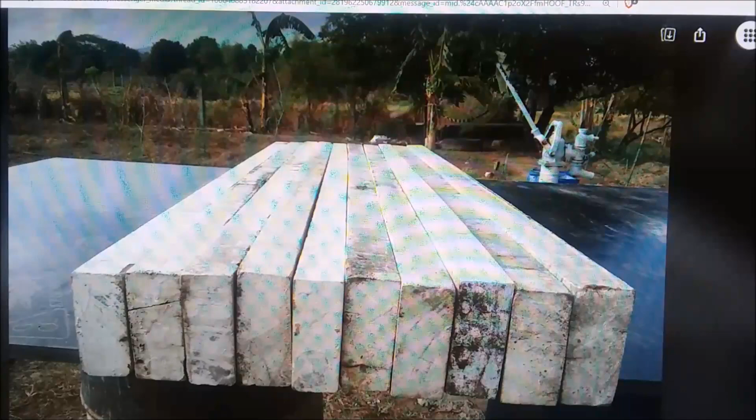They keep moving around the property with them. I don't know what that's all about.

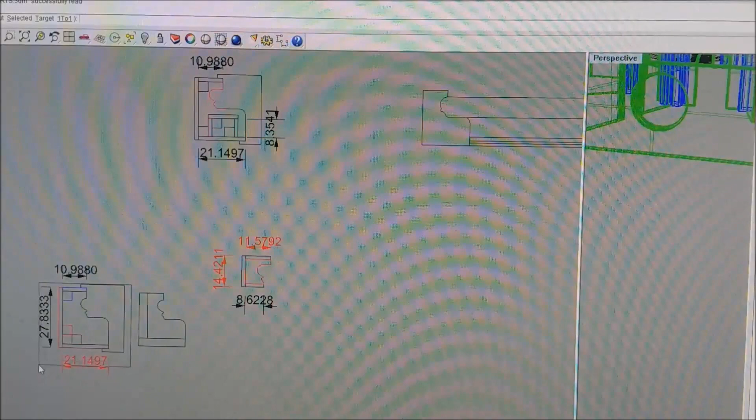Let's show you what we're going to do with these things. Here's a drawing. Okay, let's just zoom in here. Man, I hope you can see this. It's not real distinct on the camera. I don't know if it's this or not. I don't think it made much difference.

This rectangular shape out here, that's a piece we're going to cut out of stainless, and it'll have this shape in here. And this is the reverse image of what we're going to use for molding on all of our countertops all through the project. That's in the bedroom counters, the bathroom vanities, dirty kitchen. We have two more of those kitchen counters like the one we just looked at. They'll be in the dirty kitchen.

This over here, this is an end plate. It's made out of phenolic board, and it's got some 2x2 pieces that basically take up space. When we get the size of the concrete, I'm going to put a 2x4 here and one up here, and these all bolt together so that you can lift off the individual pieces and end up with this cast concrete piece. And then we'll take some blocks where this board here was. We'll put some blocks on the floor and set this pattern down.

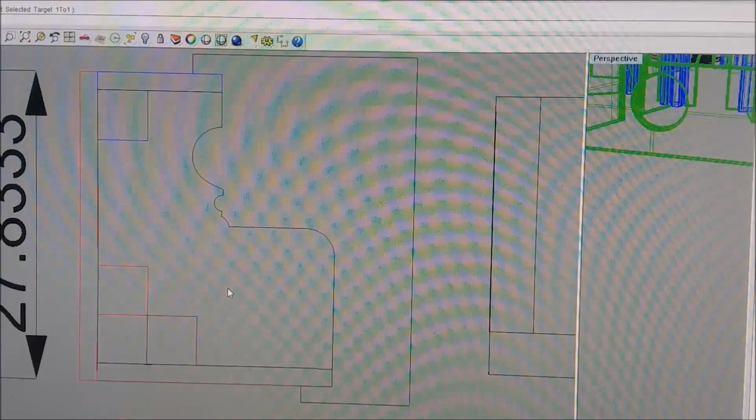And also, if you have to cut mitered ends on this to make corners and stuff, you have to cut through this. So we don't want more than half a blade thickness on either side to cut through. We can cut from both sides and then smack it with a hammer on the waste side and pop it off. And then you have to get the diamond dry tile blade and trim it some.

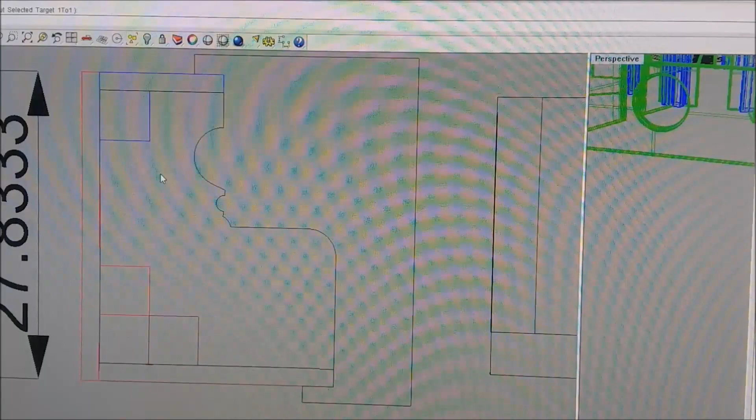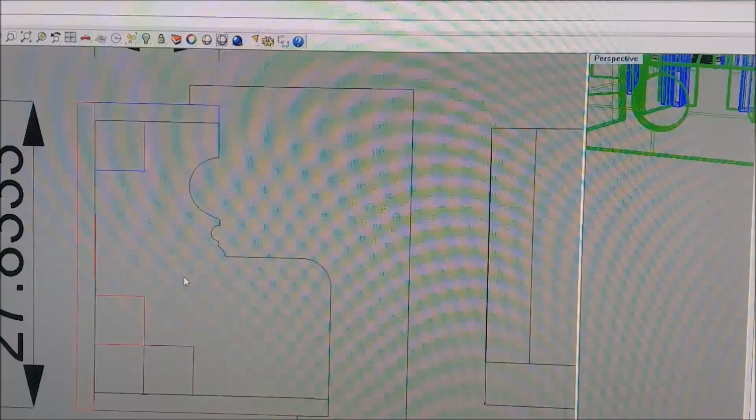This stainless piece here, this whole works is to be laying on this back side over here on the left, and you dump your cement and sand mixture, like mortar mix, except we use a little bit extra cement compared to mortar. Mortar's 4-to-1. We mix this 3.5-ish to 1. You drag this thing down and shove it along, leaving this shape.

And you can't do it in one pass, obviously, but you're going to throw a bunch in the bottom, and then you're going to throw another layer on top. About the third layer you throw in there, it's starting to look like the thing a little bit. Well, like it melted, I don't know. Anyway, when you come down after that and you actually start touching the material and dragging it to that profile, your next pass, you're going to sprinkle it with water, like a 2-liter Coca-Cola bottle with a hole in the cap, knocked in with a nail, not drilled.

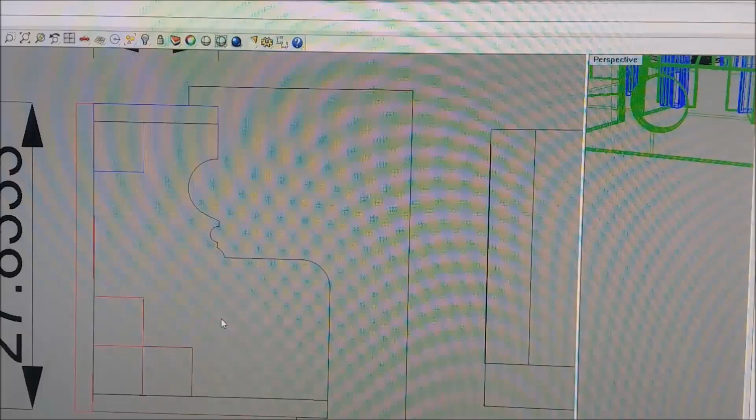And you sprinkle it with water, and then you come by with a bucket of dry cement and just a handful of it, and just trickle it all over that, make the surface white. And that way when you put the next layer of this mortar mix on there, it sticks, it bonds. And you're going to make about 5 passes that way over the whole 8 foot. And this end plate is the same shape as what we're doing. So when you get to the end, any excess just gets pushed off the end of the form. And anyway, you get this piece.

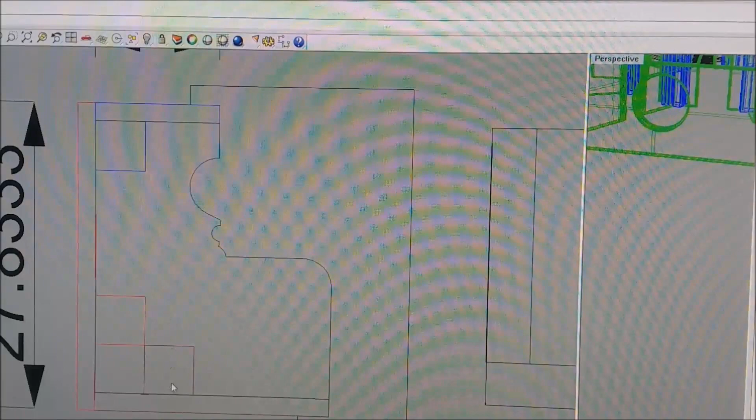When you're making these things, this stainless plate has got a couple tabs that run down on the top phenolic board and under the bottom. That locates it up and down, and this face here in and out, so that it tracks. It's like being on rails. The kitchen countertop or bathroom vanity top has exactly the same shape, just for uniformity in the house.

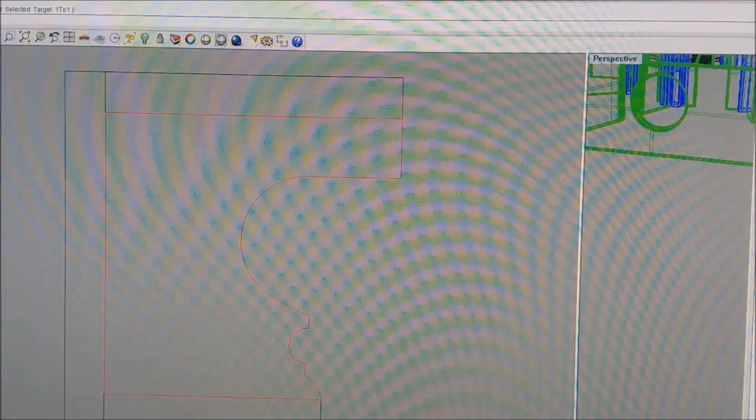Yeah, I wish that showed up better. Edit. Layers. That shows up better. That's black.

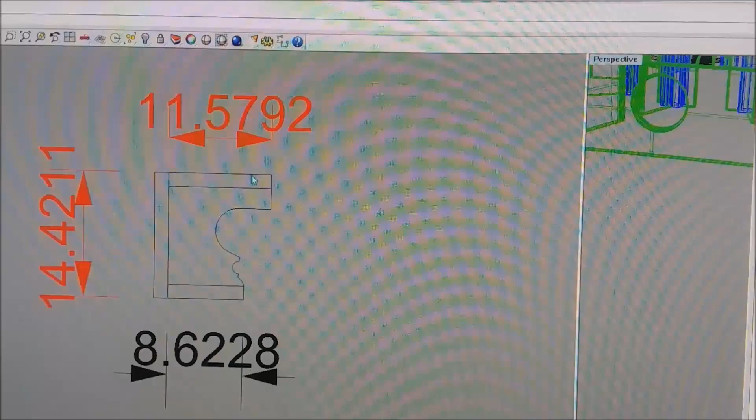Well, the other one was black too, but it didn't show up. And there'll be another stainless drag that makes this shape. Okay.

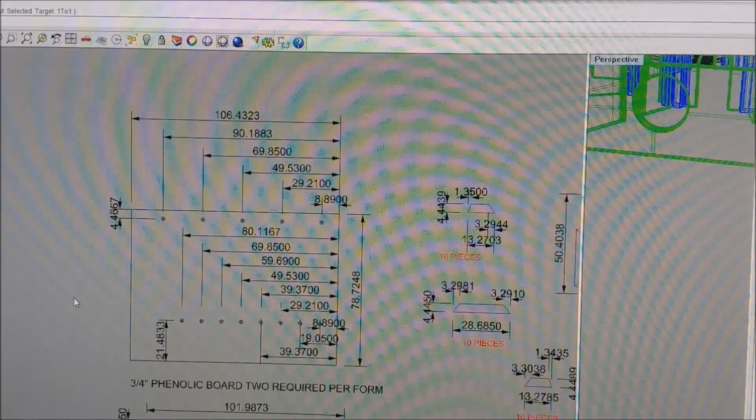Next thing, what we're doing here is we're making the supports that go under the countertop between the floor and the bottom of the counter. You have these uprights generally made out of 4-inch hollow blocks, slathered in render, and then skim coated, and all the stuff you do when you're working with hollow blocks. And then you pour a 3-inch slab of concrete on top of that, and that'll have some rebar in it, fit around the sinkhole, and just generally in the top, maybe 7 or 8 inches apart both directions.

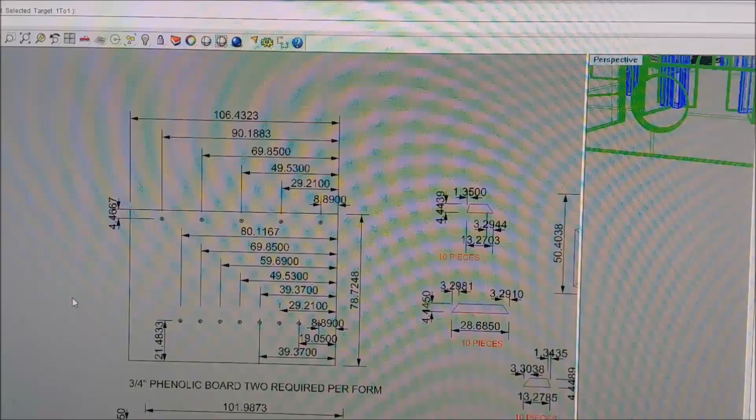And on top of that, you're going to put a piece of granite. Or you can take... Richard Armstrong is building a house up there in northern Luzon. And that's the island that Manila's on. And he's doing all polished concrete. And his stuff looks so good. We're initially going to go with polished concrete. We're going to copy him. We copy a lot of people.

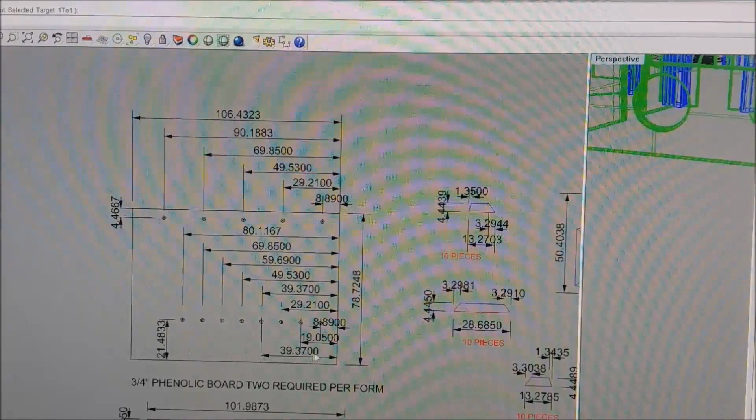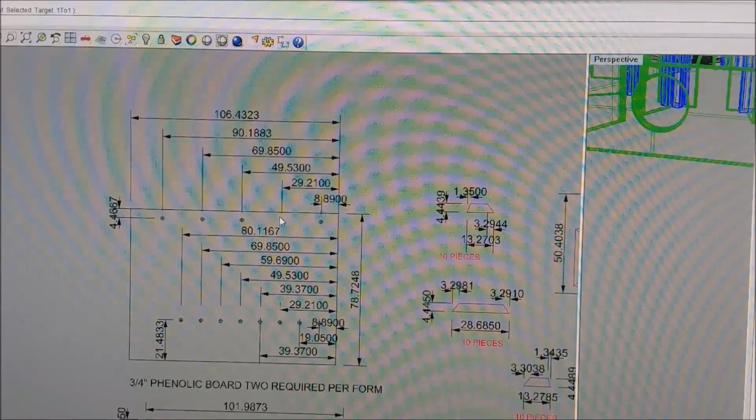The top ones, these are just holes that after we cast it, we're going to just put short pieces of rebar in, and then we can set phenolic board from one upright to the next, which will be what holds the concrete till it cures. Then you tap out these pins, and the phenolic board, you hold on one edge and knock on it, it'll come down. Plus, it'll have this sitting out here, the concrete molding edge, that just comes right off, and that gives you a big wide shelf to smack with a block of wood and a hammer.

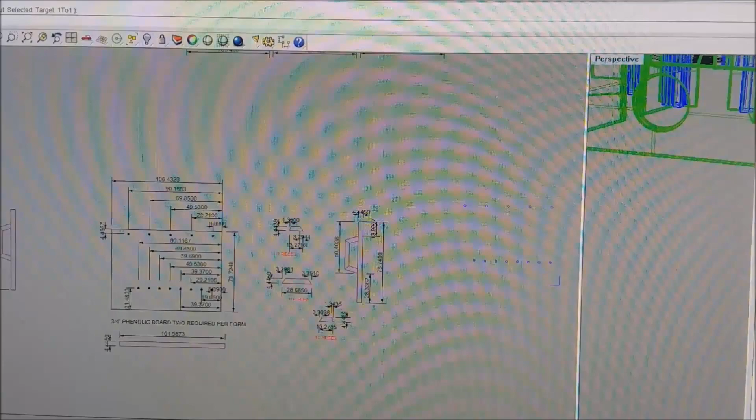There's an end piece that's going to fit in the back, and a bottom piece that's going to fit on the bottom, and a divider piece. We've got the drawings done for pretty much all this. This is all the little bits that go into one mold. We're making 9 molds. We're going to use each of them at least 9 times. Probably 14 or 15 times when all is said and done.

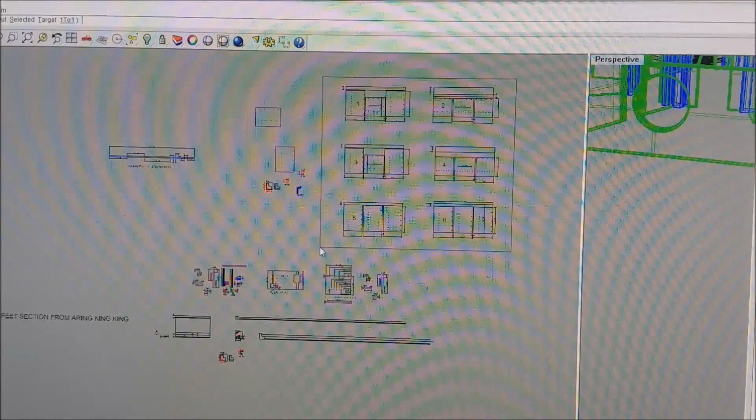Oh, you didn't want to do that?

Let's try again. Yeah. Okay, this is 6 sheets of plywood. Phenolic board. I like phenolic board because you just dust it with WD-40 and wipe around with a paper towel, and nothing sticks to it. And as long as you keep doing that, you can use it there forever.

So we have this longish one that covers the widest countertop piece we made. And then we have some that aren't as long. This is from the wall out to the middle of the room, that direction. And then we have some that look like this first one, but these are actually taller. And the pieces on the edge up here, those are part of the tracks for making the moldings that give us the edges.

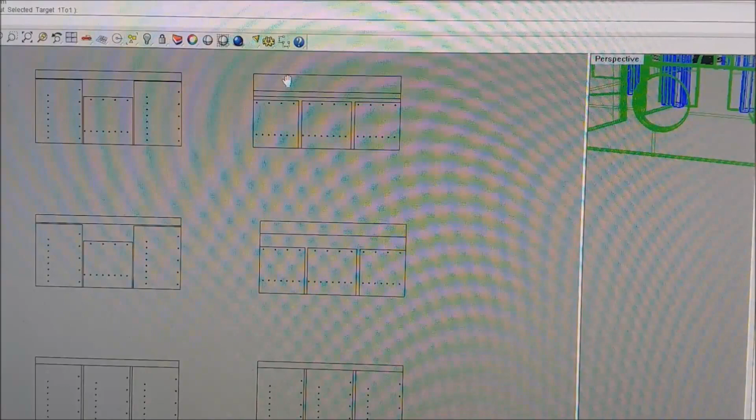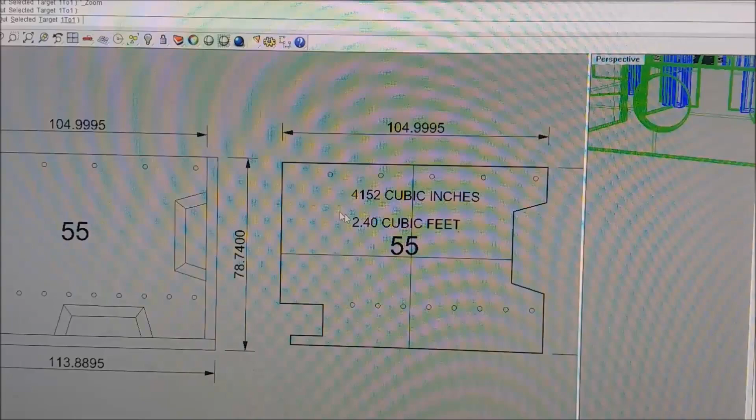Nope. Let's just take an example here and look at one of them. These go under the dirty kitchen counter. I know that because the part numbers are from 50 to 58, and this is 55. So this is about the widest piece.

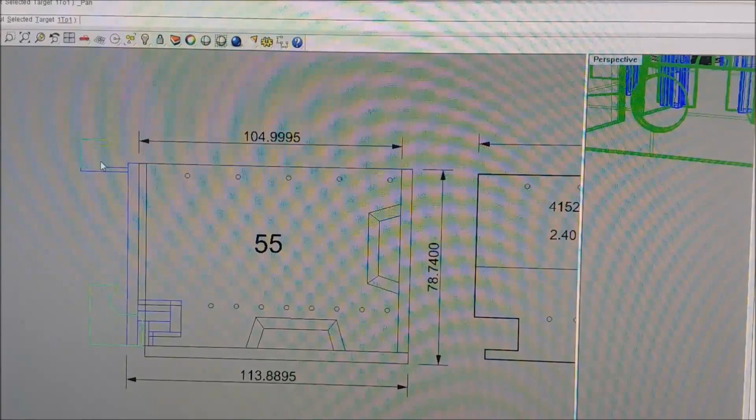When we go to use this, here's your bottom piece of concrete that's going to sit on the floor. Here's the top one that sits on the phenolic board, and the counter will come out to there. And then all your cabinet doors and hardware bolt to the front of these things. So this is not really 3.5 inches of under space clearance.

And of course, you look at the mirror image. The actual countertop ends at this little horizontal line up here. The little straight up line, that's your depth gauge for how deep to pour the concrete. There's a piece of wood with that cut on it. You just drag it down along the top of this, and that levels that edge. And then you have fishing line to determine the rest of the things.

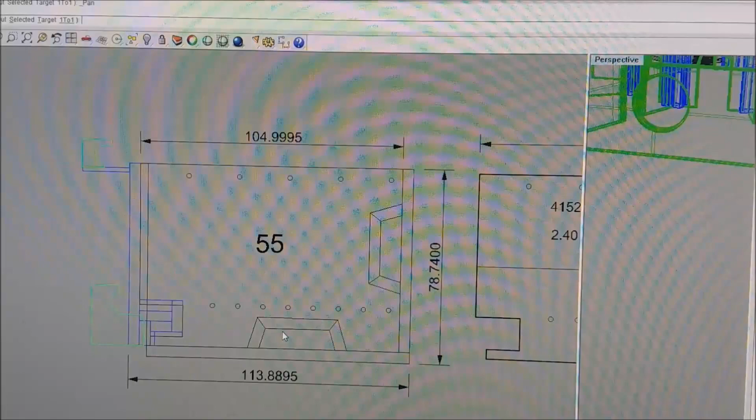This thing down the side here, it comes down and makes this toe kick shape. And there's a gap between these, so we can run a couple rebars clear out to this edge for support. In the bottom, this bottom piece has got a trapezoidal chunk on it, and that gives us the place to run big pipes from one side of the place to the other. But that'll be inside of the cabinet base concrete, so this will disappear once you pour the base.

In the back, you have that same trapezoidal piece, and this is where you run all the plumbing pipes and stuff, like for the kitchen and the gas lines and all that other stuff. It'll be retained to the back.

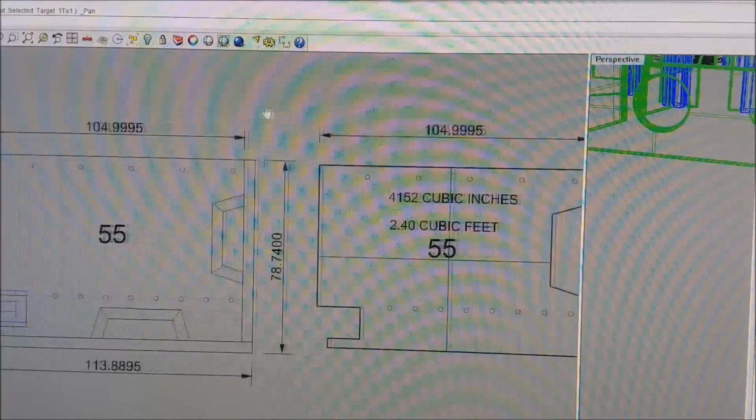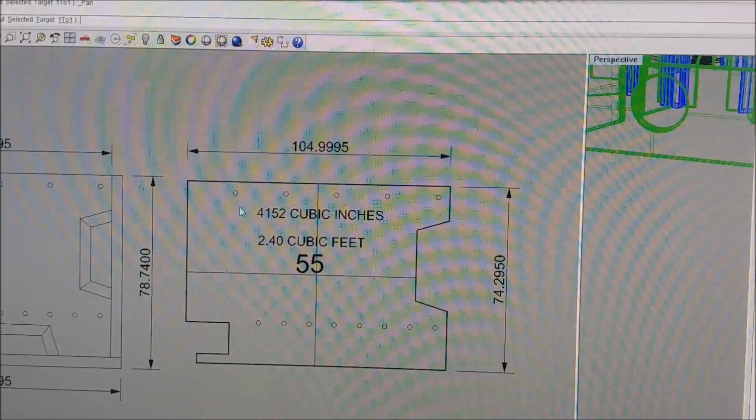This is the actual piece we're making. Part number 55. That's round about the middle of that kitchen counter. Now these holes here, there's two of these plates, one on either side of the upright that we're casting, and you'll put a piece of 1/2 inch blue plastic pipe, because the blue's cheaper than the orange by about 35%

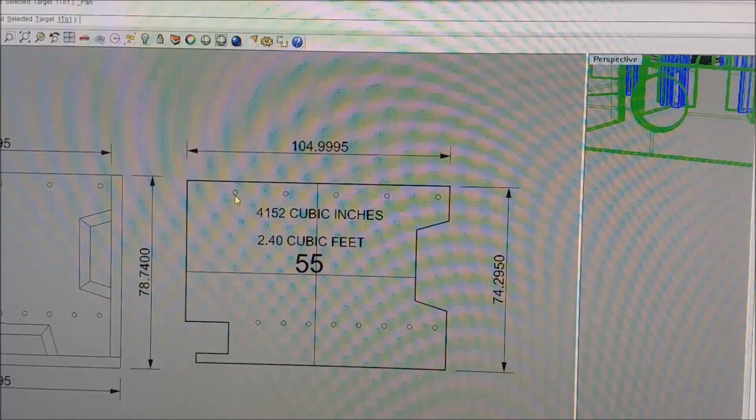for some reason. Anyway, that's the same as when we pour concrete walls with slip forms, and Texas Filipino builds with concrete. We put these blue, he uses any color he can get. I use blue now. I used to use orange till I found out they were more expensive.

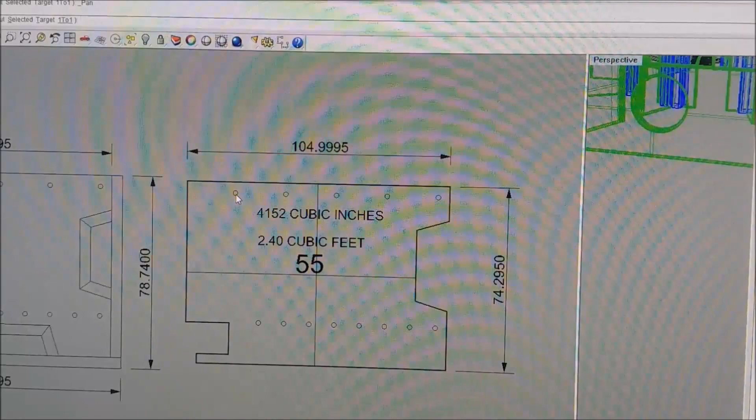But the pipes are in the concrete when you peel the sides off. Then you can knock them out or not, and that'll give you a place to run rebars through or set something on. But you have to put the pipes in there for the spacers. You clamp these plates together with these, all of them. The bottom piece, if it had this trapezoidal piece, they would all look just like this.

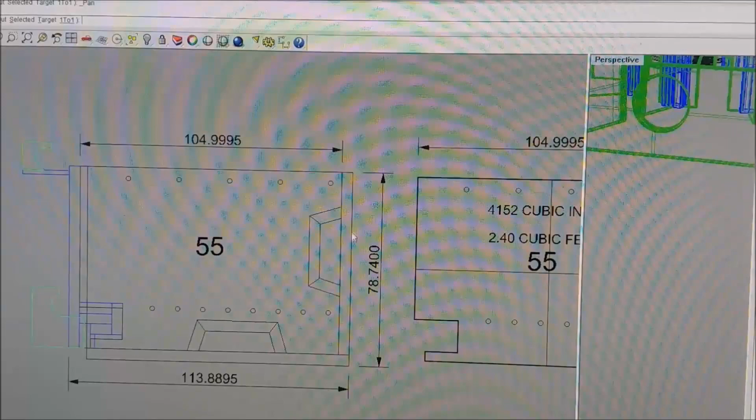And if not, we only use this on a couple. So basically you have a bottom board stuck to your side plate, and this back piece. If you don't need to cut out in the back, you flip this over and the trapezoid is on the outside. I don't know if we have an example of that real quick.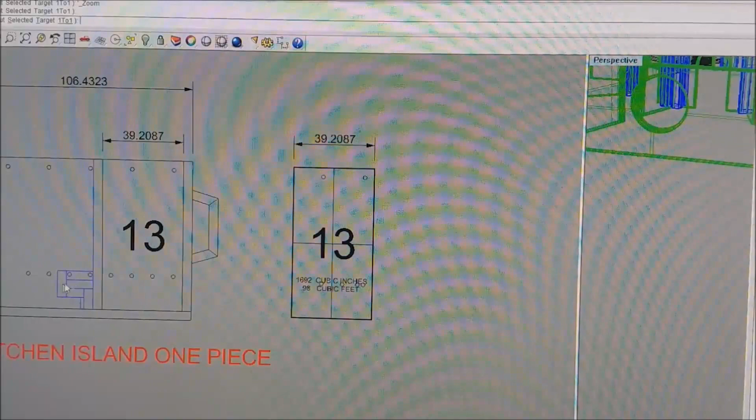Well, that's this one. Here's one where we have none on the bottom. We have got none on the toe kick side, so this one's flipped over also. So you're casting just a rectangular piece on that one. You'll notice that on these, part number 13, lucky 13.

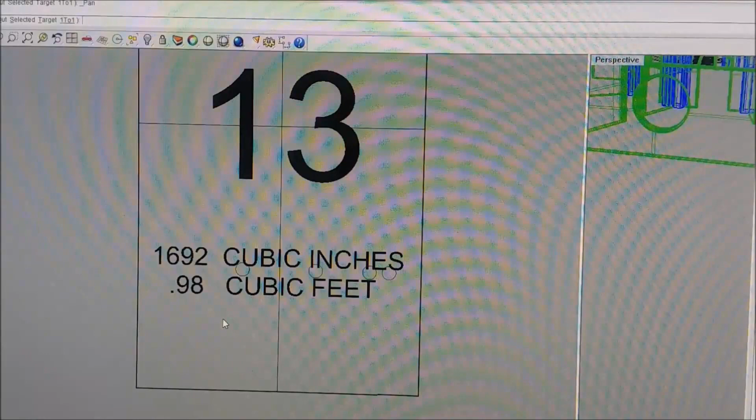1,692 cubic inches of concrete, that's 0.98 cubic feet. Okay, one bag of Portland cement and the rock and the sand makes 5 cubic feet of concrete. So what they're going to do is select which part numbers they want to pour, so that they come out to like 4.9 cubic feet, or 9.9, or 14.9. You know, 1 bag, 2 bags, 3 bags.

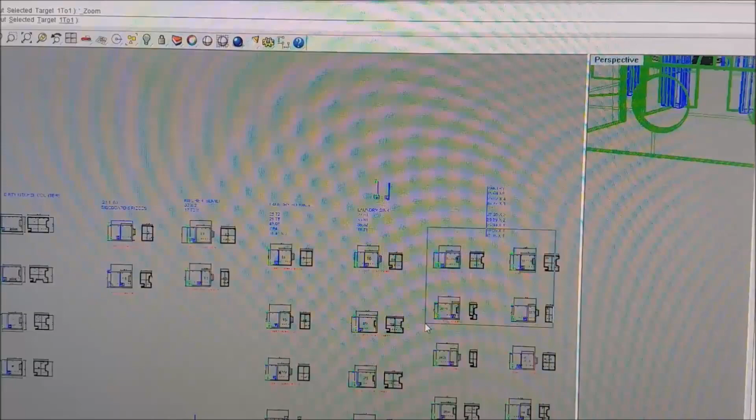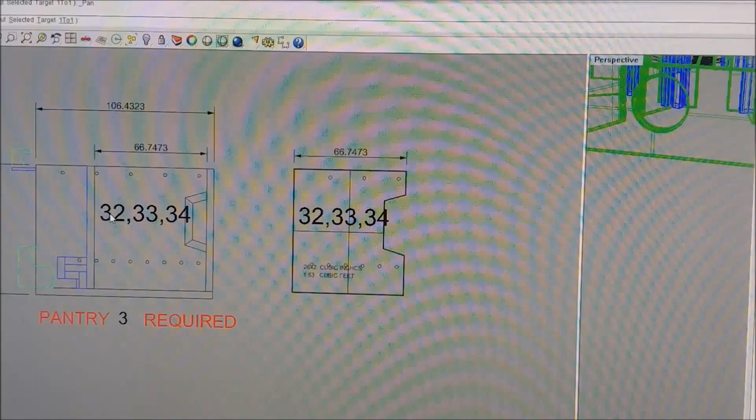All these. An example. Okay. This goes in the pantry, in some kind of a shelf and storage cabinet in the pantry. It says down here, 3 are required. The numbers on the drawing, which we're not going to get into today, but there's drawings for all these cabinets assembled and the room they go in, and locator numbers on them.

So this particular pantry shelf uses 32, 33, and 34 of this size. And there'll be end pieces that haven't got the back cut out because you don't want an end showing on your cabinet that the dog could climb into. There's 35, 36, and 37, 38, and 39 farther down.

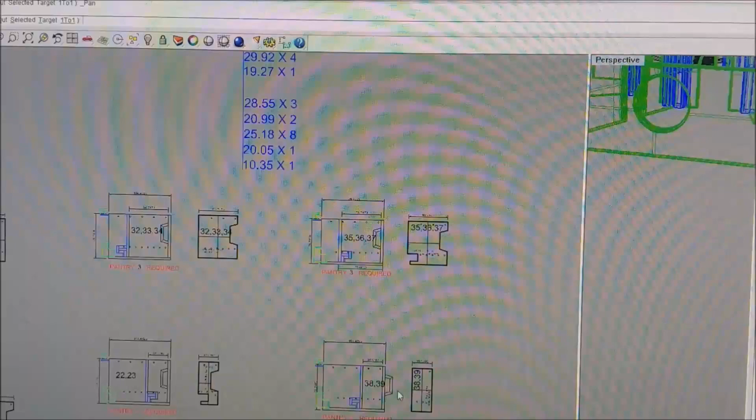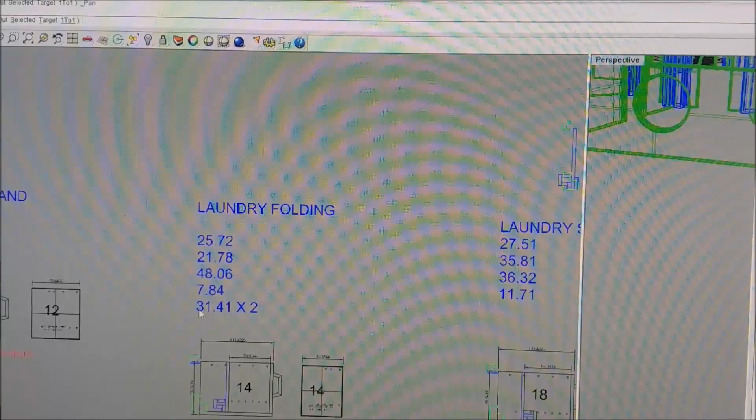For instance, this is for the laundry sink. And we have 4 different widths. If there was more than one piece, it would be in the call out. See, the width on this one is 31.41 inches times 2 pieces.

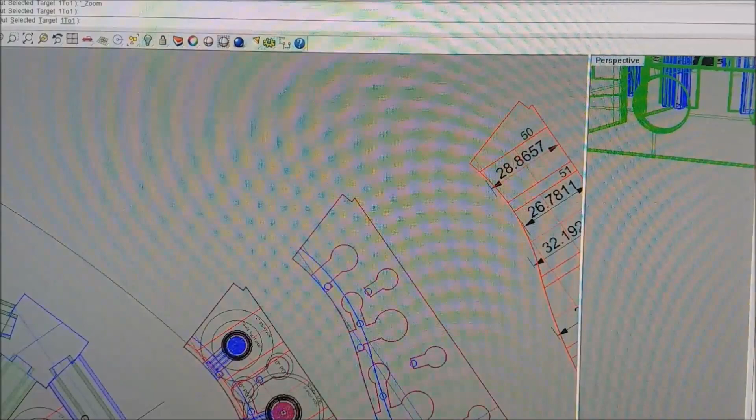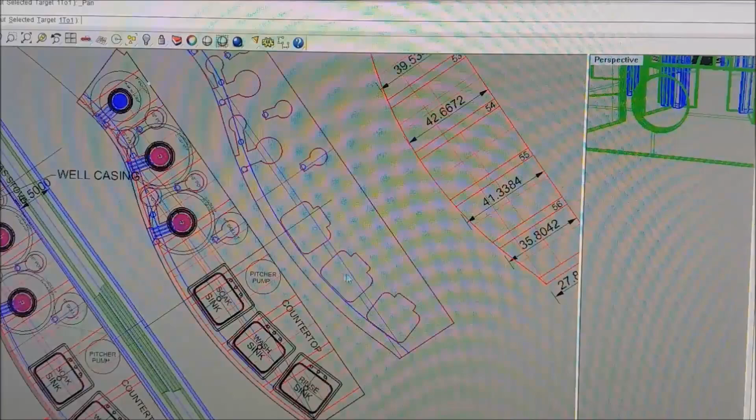Oh, this is what our kitchen counter looks like. It's got a soak sink, a wash sink, and a rinse sink. And the dishwasher would be on the right. The next picture up here is the cutouts that are in that countertop.

And the reason they're long like this is because we're using those gas burners like the street vendors have, cast iron burners. And we've set stainless steel pots down in the concrete to make this opening. And you have 3 gas valves. So in actuality, what we did was we put 2 pots.

This is an early drawing. See, it still got the Franke sinks in it. We went with the round sinks since this drawing was done. But your gas valves are here. The blue hole is the air intake, goes down into the cabinets underneath. And since this is now a smaller round pot, you have a lid that covers up the valves and keeps the trash out of there.

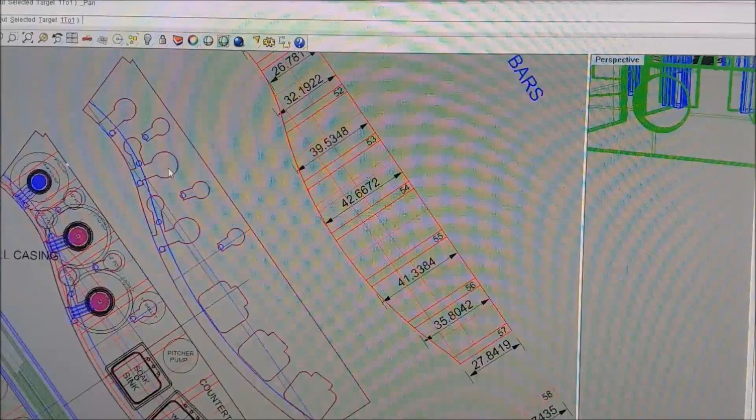And the burner sits down in this well inside of what was actually a stainless pot. We bought some without a lid for this. And we got a fire brick that sits in the bottom down there, and it sits on top of it. Fire brick just to raise it up to the right height and give us air circulation. Oh, while we're on this drawing.

Okay, this is going to be for this chunk over here. It's 28.8657 centimeters. Now, nobody can measure to 4 decimal places with a measuring tape. But if you design in inches and you have a 4 decimal number here, there's very few people that know their 16ths or 32nds in decimal. And definitely none of our people. None of the people that work in the Philippines work with

decimals, fractional decimals. So what we have here is we have 28 full centimeters, and the next graduation mark on a centimeter tape is 1/10 of a centimeter. So what they're going to do is make this 28.9. And that'll get you within a millimeter of a size. Really easy. So we gain accuracy by just going with the flow. We're just going to have to become Filipino, which is all right.

And this is part number 50. It's really only 4 inches wide because this is an older drawing. This drawing's 2 years old. It just happens to be the one I opened up to make those supports on, because it had all the counter supports, how wide they were. I could just go over here and pull these numbers off of it and draw the things without having to copy and delete a bunch of stuff and have another drawing with even more megabytes of storage.

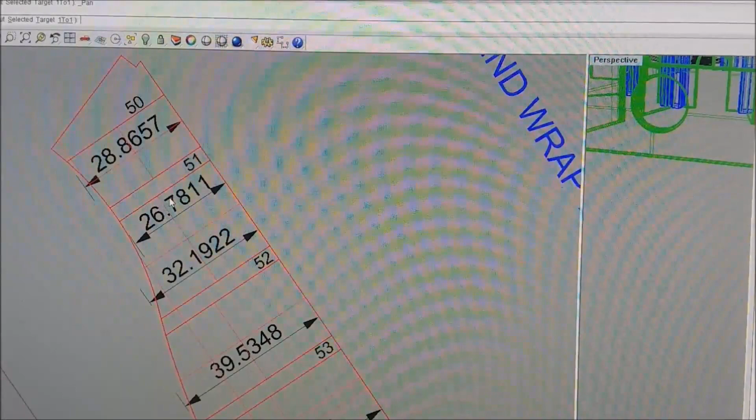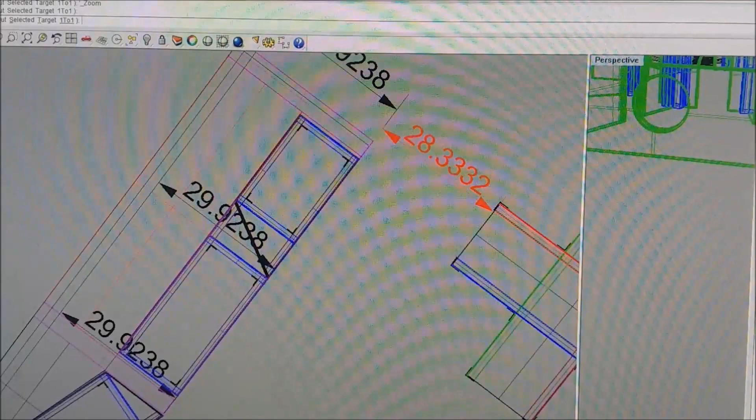Okay, anyway, these are the numbers of those parts. These are the lengths. Next door is the pantry. And all these cabinets, a lot of them have an upper door on them. This one's got 1, not shown here, but 2. There's the width of it. 3, 4 uprights. There's another one down here off screen. Still off screen. Okay, 1, 2, 3, 4, and 3 of them are the same width.

Now these doors, they're hinged out here in the front. So you can swing this door open, and then you can swing that door open. And these will fold clear flat against whatever's beside them. If you open this up, what you have here is counter space. Because when those doors open, all the storage in those doors is now facing out because it's on the inside here. So when they turn them around, you have all your canned goods, spaghetti sauce, whatever's in it, out here in the open on both sides. And you got a piece of counter space.

And then this room is the 110 volt room, toroidal transformer on the solar makes 110. Pretty efficiently, actually. There's only a change in flux when AC changes direction. So, and that's what makes your standby losses.

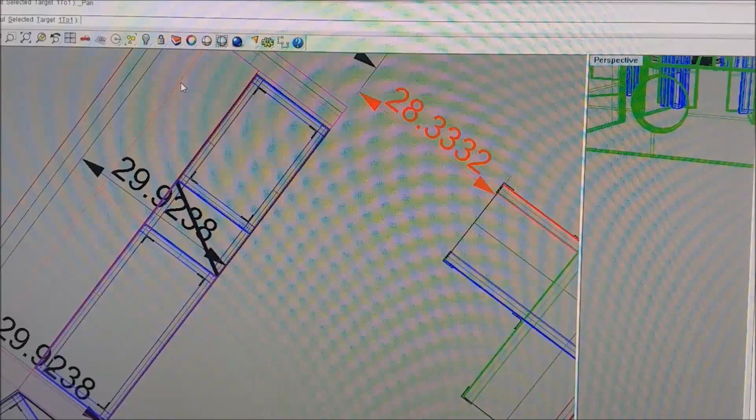So, the 110 volt room, she has I don't know how many kitchen appliances. It's a hobby. They all go in here in this one room. So you can drag them out, and if you want to close these cabinet doors when you're done, you have got to put the stuff away. I don't know if that's going to work, but that's what we're trying. The middle of the room, 28.3 centimeters from anything. That's not a great deal, but it's enough. Because this is storage mostly.

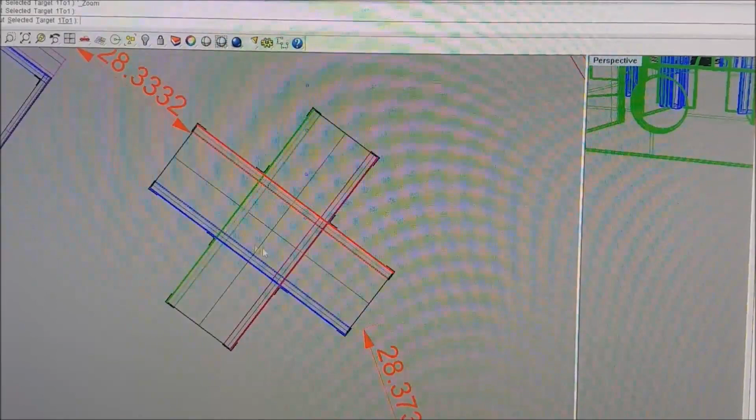What you got here is these X's of shelves that come up from the floor. This is 8 feet high. Plastic bins fit in these 4 things, and there's a floor in the middle so you can put stuff on it, but you can't slide it in and out because the bins are only this outside part. But that's an X-shaped storage.

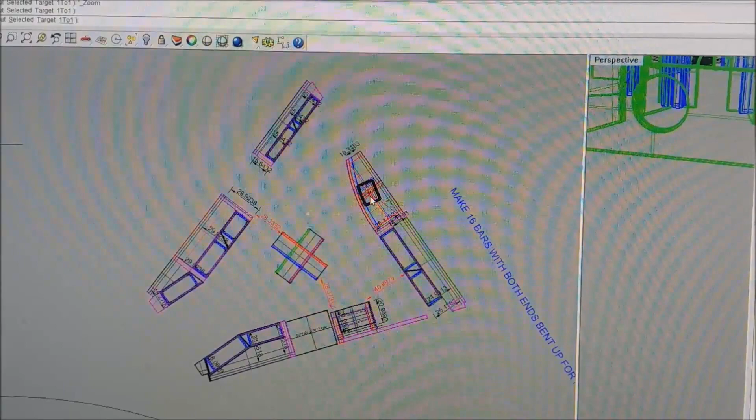This is the pantry doors. You can go out to the driveway right outside, drag in canned goods or whatever you bought. This is still showing rectangular sinks. This is just for stuff you bring in you want to rinse off if you're not sure that it's clean.

Master bathroom. And see, there's some of these counter things underneath of this. There's a bunch of them under here. This is a sitting bench in the shower. This is in inches. And that last one, that 28 walking space was in centimeters. So the front of the sitting bench to the wall was 44 and a quarter inches. And this is 6 foot 1 inch wide.

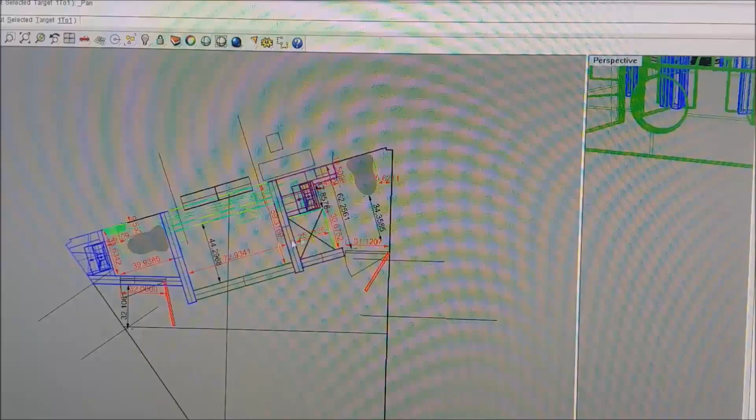That's the shower stall. And a later revision of this toilet is here. This has changed. This is a bathtub now. But the concrete of the walls, that stays the same. The door swings stay the same. The physical shape of the room stays the same. Only the way it's outfitted changed.